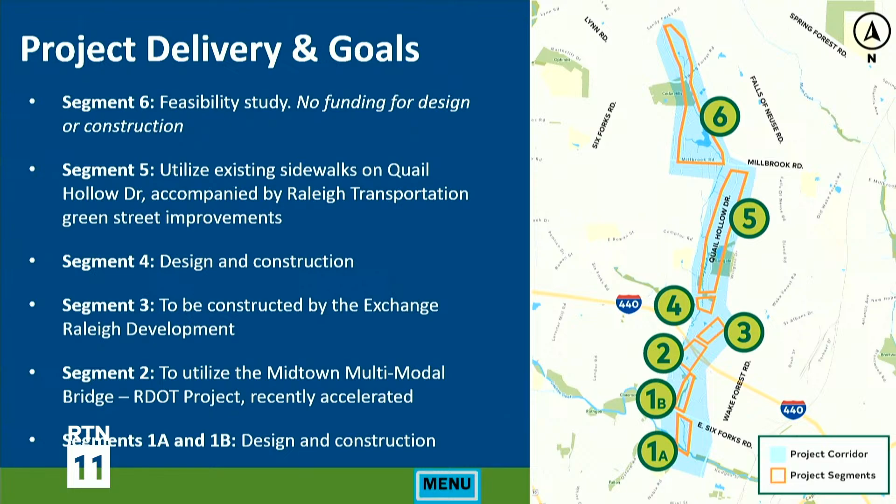To give a bigger sense of the general area - I think folks in this room are most focused on 1B, but this trail is much more extensive, in 6 parts, 3.6 miles, running from Crabtree much farther up north. For 1A, 1B, and segment 4, there are design and construction dollars. For segment 6, there's a feasibility study, but not design or construction. For other sections, it's through partnerships.

The bridge over 440 will be funded by RDOT, which is very good news - most recently, a couple weeks ago, more funding was given to them for the design of that bridge. Because of this Big Branch corridor, we saw the urgency for completing that long-awaited project, which is great news. Another segment will be done in partnership with a private developer, and segment 5 also with Raleigh Transportation at Quail Hollow, having an elevated bike path.

I want to call out the public outreach. I think Raleigh Parks is very renowned, well-regarded nationally for our fantastic public outreach, but this one really underlines it. 1,600 postcards sent out for phase one, 8,500 in phase two. In phase two there was specific focus on Crabtree. Anderson, when it comes to section 1B, had 3 sections through it in that first one, Anderson Forest - getting out to folks at Hines and Belvin and throughout Raleigh to make sure everyone knew about this very important Greenway that was coming was essential. They did a great job on that.

Now to go through some of the sections and where the rounds of voting fell. For section 1A, and this is an important one, this comes off of the trail specifically.

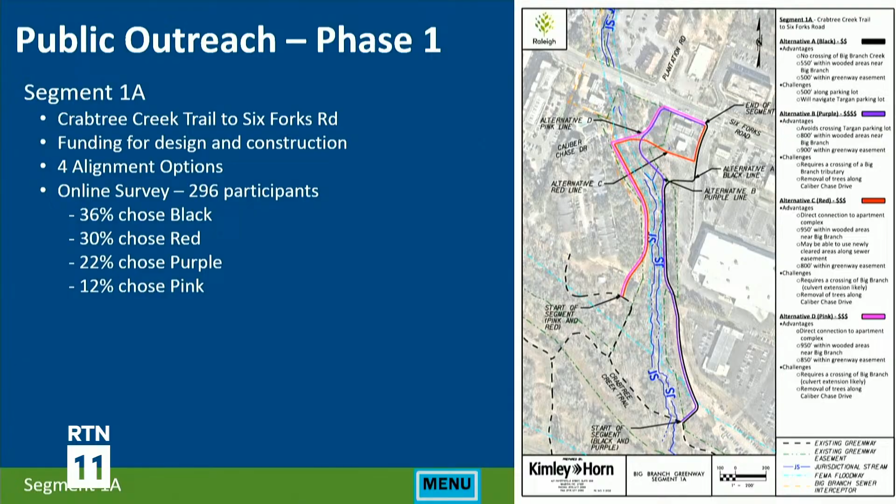This one was a combination of a couple different routes from the survey. The line in black is the one we ultimately recommended. What's important about this route is the Crabtree Trail is on the northern end of the banks of Crabtree Creek at that point. Coming up in that section is really important because when it crosses over, that would mean we'd have to build a new bridge. If we brought it up to Anderson or Barrett or other areas up there, it would require a bridge across the Crabtree. This is a section where we can just pull right off with very little vegetation issues, so we were very pleased with this section.

And then 1B — this is obviously the one in question, and one we'll talk about extensively today. From this survey we actually had 4 options: 3 were along the creek or stream, and 1 was up Belvin. There was a very mixed vote here: 49% for the roadside options, 51% for the stream side, divided between those 3 different iterations of those options.

For segment 4, again pretty clear feedback on this one — 56% preferred the black segment you can see noted. We did skip segment 2 and 3. Segment 3 was the one that goes to a private development, and segment 2 is the bridge that goes over at the end of Wake Towne, a bridge over 440.

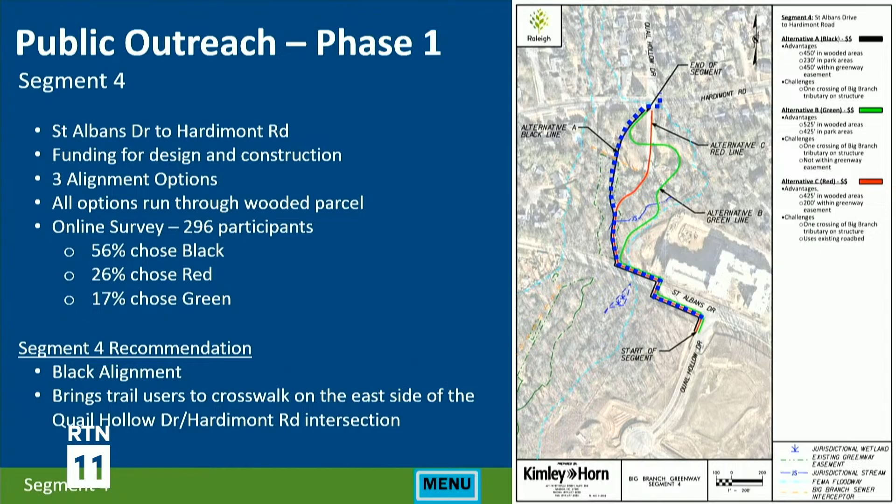And then overall, just looking at some of the concerns we heard and some of the feedback we got — obviously we had an open house, and we had an extensive survey, so we got a lot of feedback which we really valued.

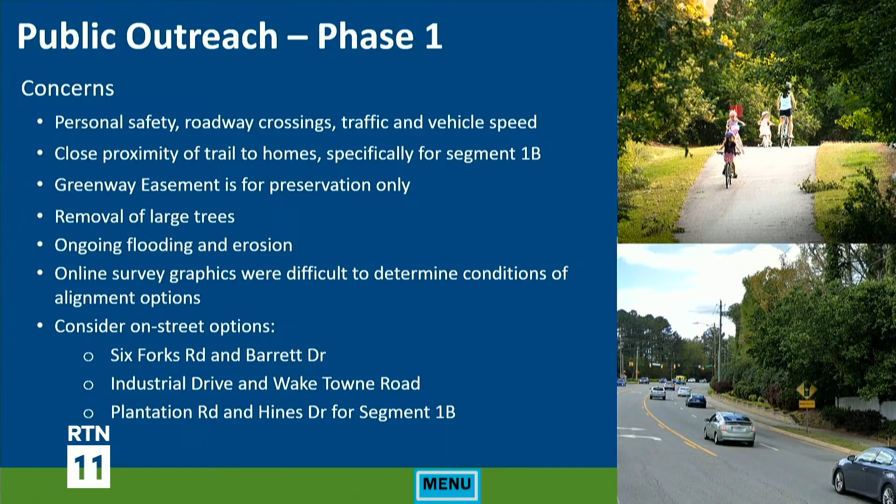Key things we heard: personal safety, particularly with the roadway crossings, traffic and vehicle speed — obviously this is near Six Forks, which is a dangerous road. Close proximity of the trail to homes, specifically segment 1B, which we'll talk more about. The Greenway easement is for preservation only, which I'm sure a lot of folks here will talk about — that was a key one. The removal of large trees, ongoing flooding and erosion, and then a push to consider different routes: Six Forks and Barrett Drive, Industrial Drive and Wake Towne, as well as Plantation and Hines, which we did end up including in the next survey.

I just wanted to zone in on two of those: Six Forks to Barrett, as well as Industrial Drive. There are lots of different permutations of trails we could pick, so these are two I'll focus on, but there are 42 other pathways this could potentially be on street — I think it's indicative to go into these ones specifically.

Any pathway that goes on the streets is not necessarily tantamount to a greenway. We're really trying to build a greenway, not a bike lane — and unfortunately a dangerous and not very appealing bike lane at that. This would involve 3 road crossings, 3 residential driveway crossings, 8 commercial driveway crossings — a lot of conflict points, which we really want to avoid, especially given the number of strollers, bikes, and cars on this pathway. Keeping it safe is extremely important.

On top of those clear safety issues, there's also the circuitousness of it. The big branch alignments we showed — the Hines one, the Belvin, as well as Anderson Forest ones — were about 0.57 miles, whereas this would be 0.95 miles. As we try to develop a greenway used for active transportation, where people are trying to get to work fast or get to appointments, that directness is really important.

Another important point, which I'll get to in a bit, is the sidewalks right now are 5 feet. We would have to extend those to 10 to 12 feet, as I'll show shortly, which means as you expand the sidewalk you start to go into people's front lots in a lot of those areas, particularly side lots through Anderson Forest on Six Forks. The next one has a very similar rundown.

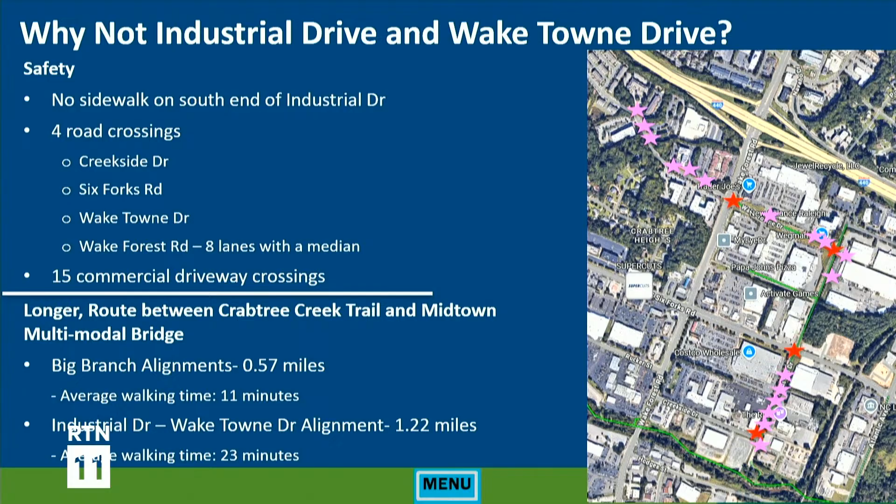This one is even more indirect. It goes from 0.57 miles with the three alignments we ultimately voted for versus 1.22 miles. So it's a much longer pathway, as well as severely dangerous for a lot of users.

This is relevant whether it's Six Forks, industrial, Barrett, Anderson, or any other permutation. The greenway needs at least 10 feet of width for the pathway, 2 feet on each side, so the existing sidewalk bed is never going to be sufficient for building out a greenway.

It's always going to require an expansion, no matter the route, or if building a new trail, hoping for somewhere between 14 to 18 feet - 14 being 10 for the path plus 2 for each shoulder, or 14 for the path plus 4 total for the shoulders. For this highly trafficked route, with turns and sometimes hilly terrain, you don't want to narrow the width significantly, because people coming around bends need that space to get around each other. So the width is important here.

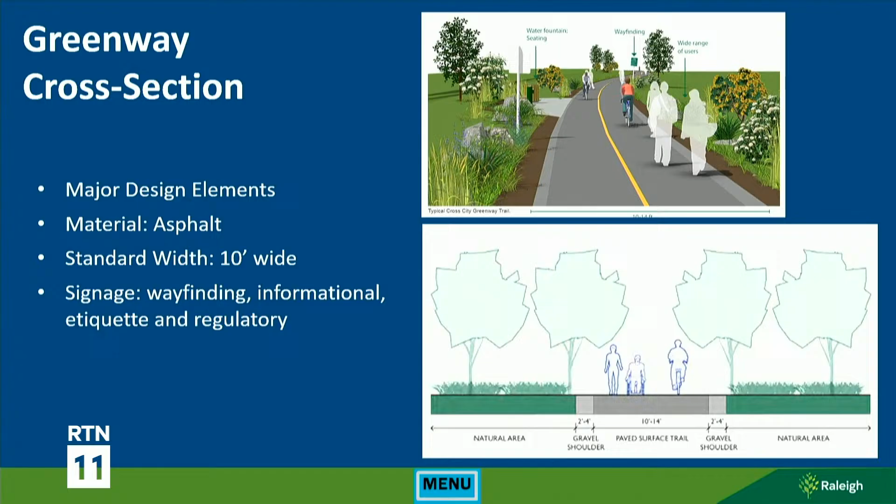This brings us to the three alignments that were brought to a survey. As detailed earlier, this was a very well-populated survey - I think aside from the Greenway Master Plan itself, the most voting we've ever seen in a park survey.

Three alignment options, with expanded outreach through door hangers and yard signage. We really tried to enhance the graphics and visuals so it was very clear what the routes would look like, along with improved alignment descriptions.

The survey itself, which folks have seen, is on the public input page. What we saw was 62% voted for the streamside alignment through the backyards of Anderson Forest, 34% for Plantation Hines, and 3.5% for Plantation Road.

If you drill it down, because this has a lot of votes nationally, which is kind of a quirk - sometimes it's people voting from far away, sometimes it's just the IP address - but if you drill down specifically near or inside 540 or 440, 68% were for the streamside alignment. So it's important.

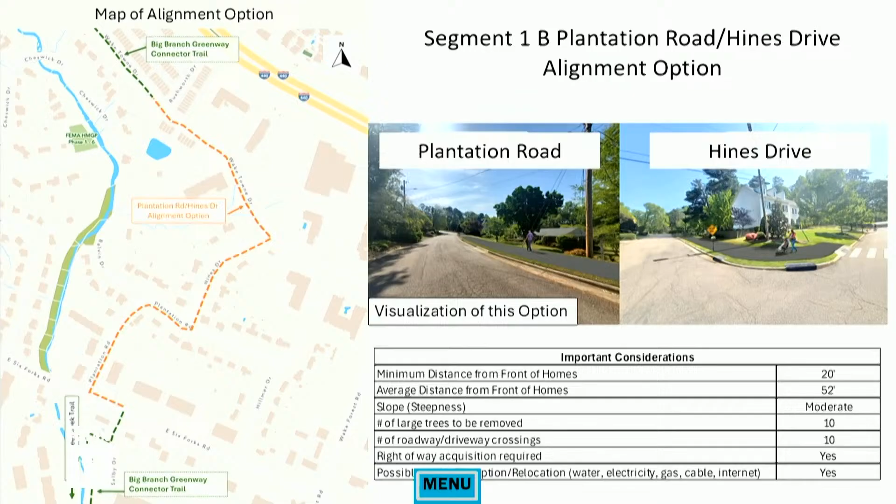We can go through these quickly, but this was the alignment shown in the survey and also during the public outreach and the public meeting.

Here's a complete rundown bringing things together - this is what was compared and what people saw as part of the survey, seeing the different distances from the front of the homes and from the back of the homes. The slope is obviously important, particularly for safety as we have folks going in different directions.

Number of large trees to be removed - you can see we updated that at the bottom after doing another analysis and a walkthrough with the Greenway Committee, the Parks Board, and members of the community. We do think it could be a larger number of trees.

It's hard to be very specific because we're not even at 30%, or 60% final design yet. We'll know the precise route and the number of trees impacted, the critical root zones, once we get there. At this point it's a guesstimate, but I think it holds the proportions where we see a bigger tree impact going through the front yards of Plantation Hines and Plantation Belvin.

Key takeaways from engagement: strong ongoing support for the project. Raleighites, as we all know, love the Greenway system, and across the board there's really high level support for this project, for Big Branch, and for the importance of continuing to build out a Greenway system, particularly in high density and fast growing neighborhoods. The streamside alignment was the preferred option according to the survey - that was fairly clear.

Impacted properties are concerned about reduced privacy and stormwater impacts - that's something we heard consistently, which is very important - and then user safety concerns due to Greenway crossings and traffic.

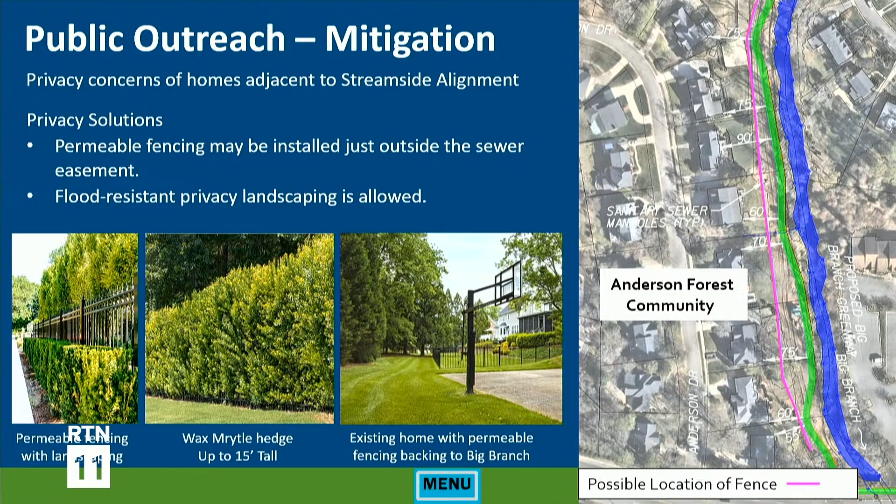Often you guys ask, can we do this sooner, can we do this quicker? Obviously adhering to this schedule is really important so things don't get pushed back. So please, opening it up to the floor for discussion. I know there's probably a lot of questions, so who wants to go first?

Ian: Thanks, Adam. So a lot of comments at the Greenway meeting. Two questions I've thought of since then. The first is on the Creekside option. Do you have any data from Raleigh Police about the difference in incidents or calls from a Greenway versus a utility easement, either for that specific area or in general, anywhere in the city, from current state to what it could be?

Yeah, we can come back with that data. I believe you guys got a letter this morning in support, but in general, we've seen from national studies, as well as studies from NC State and Raleigh, that crime rates stay the same or go down after a greenway is designed. We can look more specifically at different easements and greenways and what the rates are, so we can come back with that.

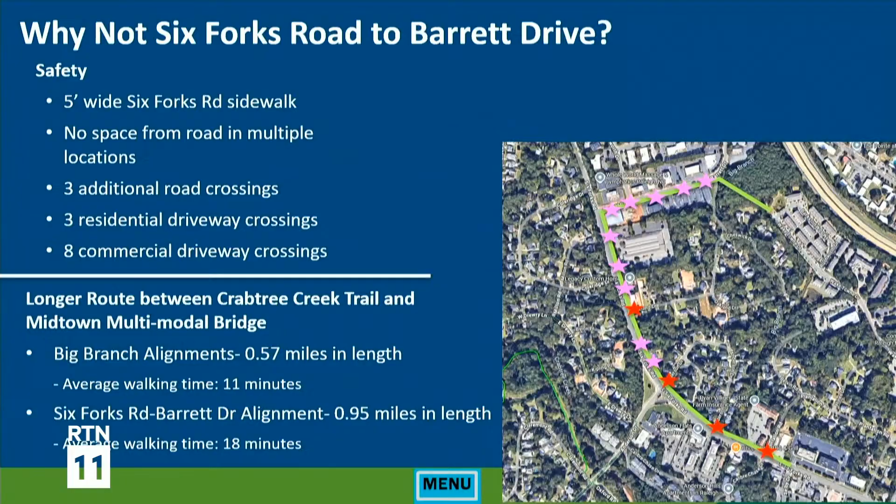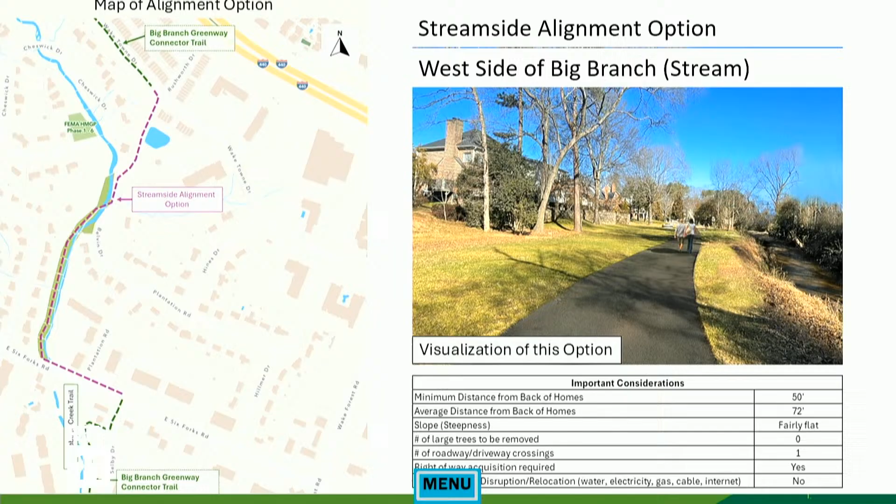And the other is, in the analysis, there wasn't any discussion about the fact that this is Neuse River buffer, and for 30 feet, there's not supposed to be removal or construction unless it's specifically permitted. There's no discussion about the difficulty or not of getting that permit, and I don't think the city should be removing vegetation and doing construction, particularly earthworks that are going to go into the floodplain and cause more flooding.

Yeah, and we talked about this, we had an email back and forth. I think this picture, agreed, is unfortunate because it is not representative of the stream bank restoration. Stream bank restoration, as we've talked about, invasive species that often break down the stream bank will be removed, as we try to do across the city. Local flora will stay, as well as increased plantings in order to fortify the stream bank. The roots fortify the stream banks.

So in terms of what it would look like, it would actually be closer to, we can show, significant vegetation brought to that space, not the opposite. So we will work on making sure that the visual we have from Kimley Horn is representative of the increased planting we're bringing there, not the opposite.

And then you didn't address my concern about moving into the Neuse River buffer and getting right on the stream bank. Yeah, I mean, so I think 68% of our greenways is within that buffer, is very close to stream bank. The plan, I referenced that NC State study, and then just in general, the basis of our greenway system is building inside of those sewer easements.

But that was from 1970? For sure. And I would hope that we've gotten smarter. And we have, and I think that's this slide, I think, underlines that.

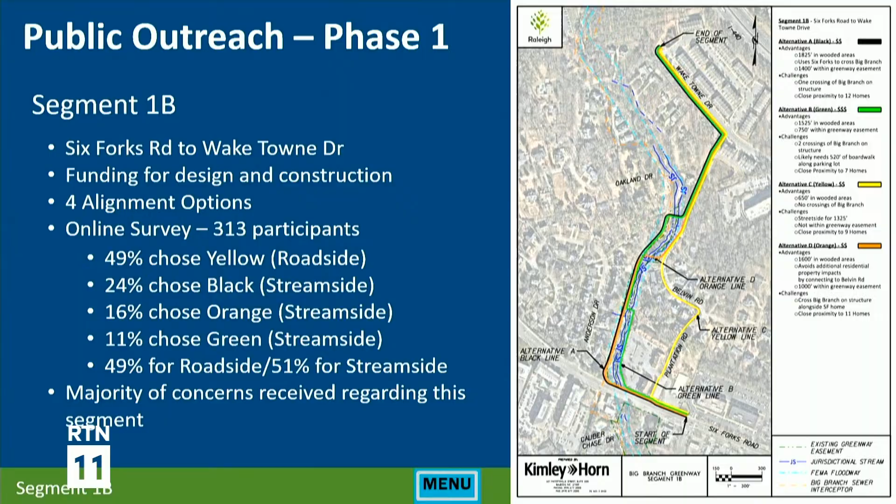The city already has the right-of-way, you can look at where the service poles are. We spoke about that, we can read the poles and tell whose they are. But the poles in many subdivisions sit significantly behind, because when the houses were built there was some thought of sidewalks and other things, and trees grow and people forget about sidewalks.

But the neighborhoods we saw have at least 8 to 10 feet. I'm assuming a sidewalk would have at least 3 feet of spacing from the curb, maybe 5, maybe 6 feet, depending on what you could fit in there.

But if you went with 5-foot sidewalks on both sides of the street within the land the city already owns, I don't think people would be happy losing many of the trees they've loved and planted over the years. But it would be a sidewalk, 5 feet on one side and 5 feet on the other. And yes, you can ride bicycles on sidewalks, that's where children learn to ride their bikes.

Yeah, I mean, that was certainly one of the options put forward, some permutation of that. It would mean tree loss and utility relocation on both sides rather than one, as well as sidewalks on both sides, or driveways on both sides. But yeah, that's something to consider.

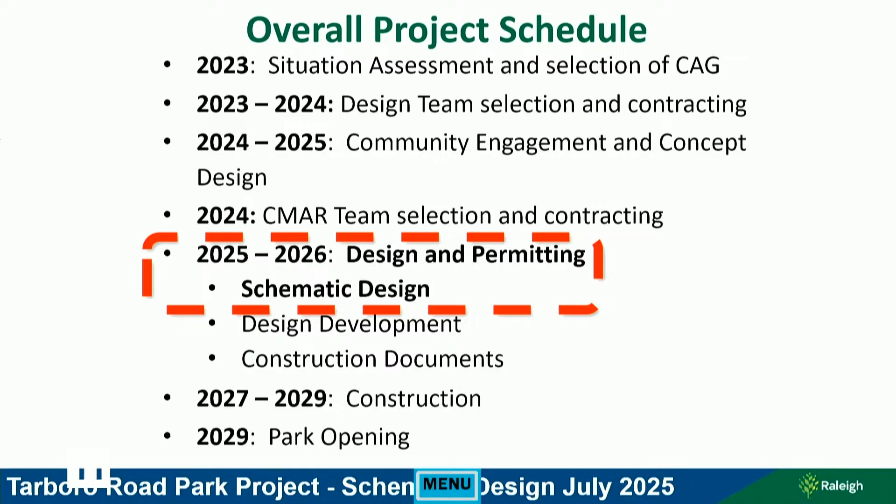Over the past year, we have gone through the concept and schematic design process. We anticipate that construction will start in 2027, last approximately 2 years, with a park reopening in 2029.

The design consultant is HH Architecture. The public artist selected for this is Deborah Asham, and the construction manager at risk is Clancy & Theys.

So the engagement for this project primarily revolved around the formation of a community advisory group. To date, we've had 5 meetings with that particular group. We have had 3 open houses to date, and we anticipate a 4th open house later this year as we advance into the next stage of design, just to keep the community informed with the design henceforth.

With each of those open houses, we also had a series of online surveys, and then we also had boards of the projects and a 3D model of the project on display at the community center.

So the schematic design itself really centers around the heart of the project, which is the central plaza, with most of the amenities surrounding that one central plaza. You can see the area circled right there - that's the central plaza. And immediately to the north of that is the brand new community center, which is a 2-story community center.

It's 21,000 square feet total with a gym. We do intend to go for LEED Silver rating on that. There are a series of overhangs that surround the entrance to the building that will serve as a porch and gathering area.

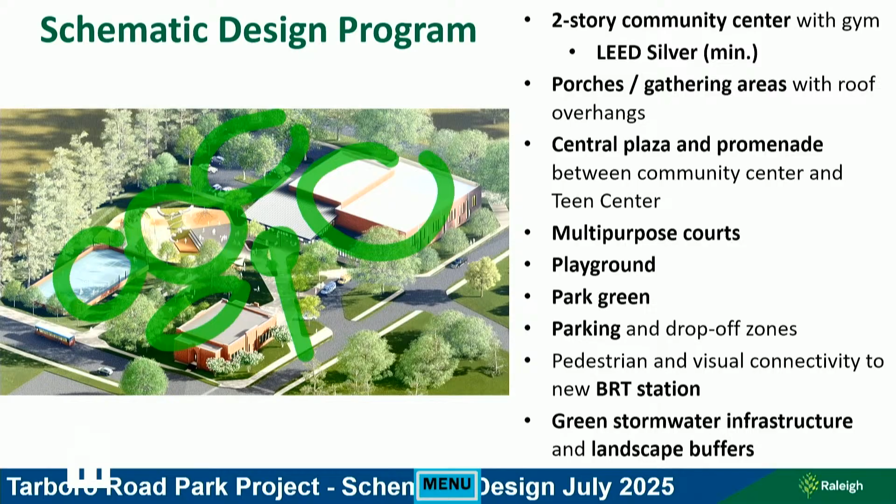There's also pedestrian and visual connectivity to the new BRT station that's going to be on Edenton Street. As with all our other bond projects, we are also incorporating green stormwater infrastructure, which you all heard about earlier today, as well as landscape buffers.

So here's a plan view of the site plan, again just emphasizing the proposed community center and the central plaza area, the playground, the teen center, the multi-use court, and the parking lot.

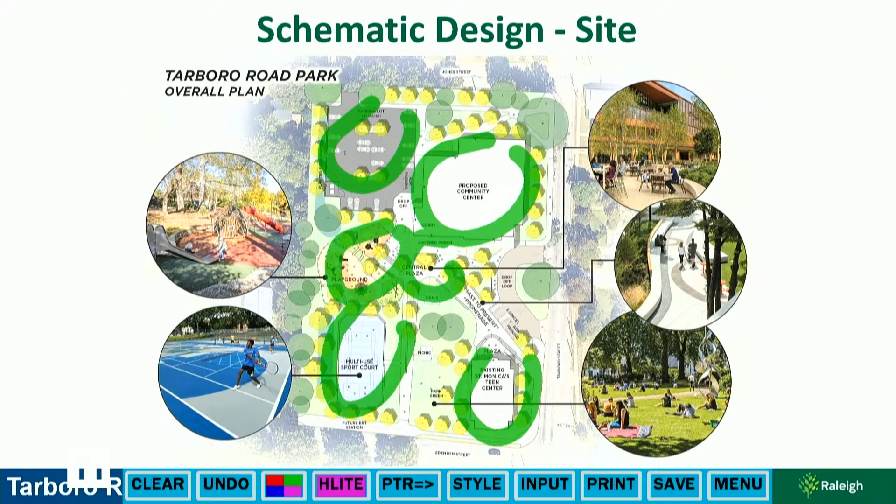There are 2 multi-purpose rooms within the community center. The smaller one is on the first floor. There's also a fitness studio. The rooms are connected by a rather wide corridor, then restrooms, and the remainder of the first floor is primarily for storage as well as the maintenance rooms associated with the community center.

And then there's the gym itself too, which is striped out for basketball, volleyball, and pickleball.

The second floor is composed of the larger multi-purpose room, which takes up most of that floor. There's also an adjacent warming kitchen, 2 family restrooms associated with that, and another storage room.

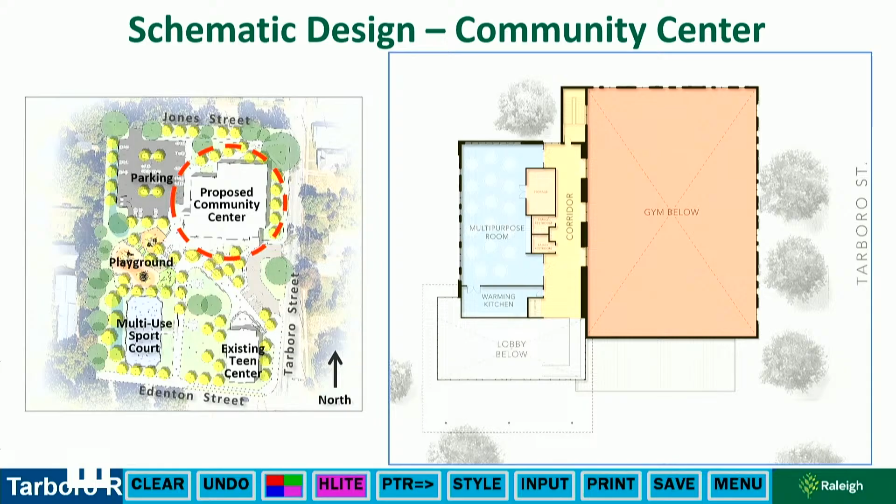The walls are indicated by the black lines. You'll also see openings within the black lines between the corridor and the gym below—those are windows so people can be up in the corridor looking down into the gym. Around the gym there's also a series of openings meant to represent windows that bring natural light into the gym.

Here's a rendering of the entrance into the community center, as seen from the playground, looking across that central plaza. So that's the entrance and that's the lobby area as well.

This also gives you a little bit of a preview about the current art concept, which includes a series of illustrations of community members, both past and present, incorporated into the glazing of that entryway.

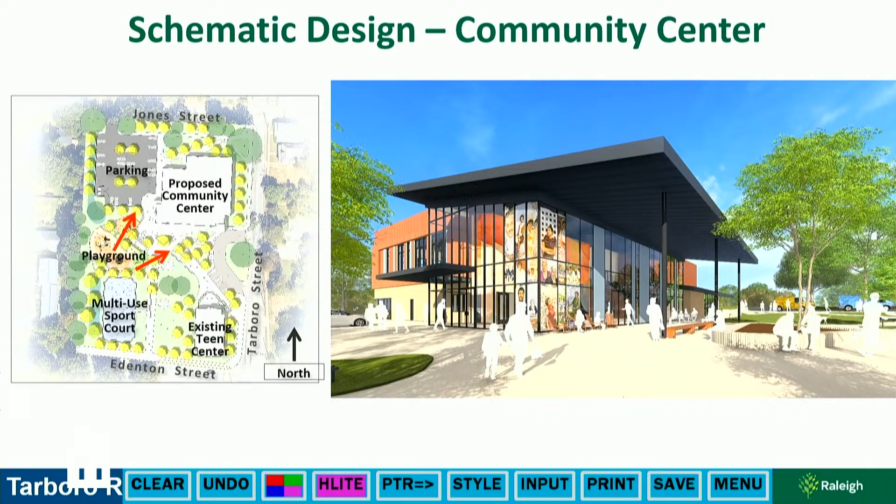Coming back to the site plan, I want to emphasize that 3D model we've used throughout the public engagement process. It's been really helpful to help people visualize during those open houses as the design has evolved over the past year, showing different representations of the community center. This is the final product right here, side by side with the bird's eye rendering.

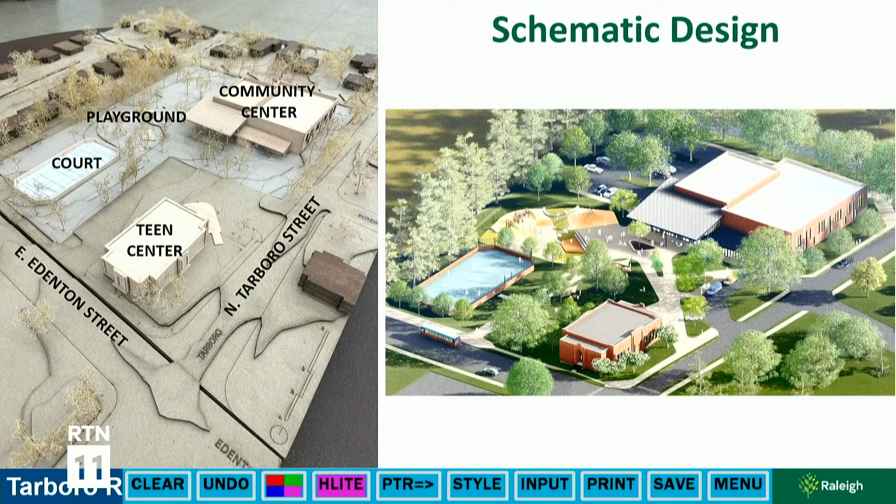So the St. Monica Teen Center has a number of interior improvements meant to improve the finishes and energy efficiency within the center, including new flooring, wall painting, window shades, LED lighting throughout, new cabinetry and countertops, acoustic ceiling treatments, and new restroom finishes and fixtures.

Along the front entry into the teen center, there will be a new plaza area meant to improve accessibility into the center, as well as provide a good connection to the past-to-present promenade I previously mentioned. Being a historic structure, there are no planned improvements for the exterior of the building itself, other than the plaza entryway, which is not associated with the facade of the building.

The public art process—the artist is Deborah Asham. She has been involved in several other Raleigh projects before, but for this project her work centered around drawings of historic places and people important to the neighborhood around Tarboro Road Park, including scenes of community life based on family photos, as well as interviews she conducted with community members. She's also embraced the neighborhood landscapes in her artwork.

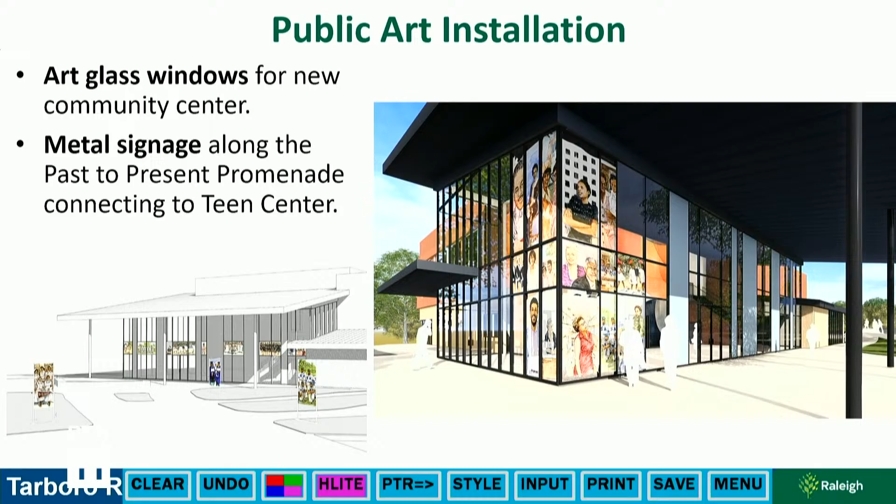Next steps: we plan on going to council next month in August. Next month is also the start of the design development phase, the start of the advanced design stage of the project. We plan on a fourth open house, currently scheduled for October 22nd, but that's penciled in, not set in stone—there may be some change based on how the design progresses between now and then. But we plan on the open house sometime later this year.

Next spring is the start of construction documents and permitting, with construction bidding in early 2027, start of construction in spring 2027, and park reopening in spring of 2029.

Staff recommends approval of the schematic design for Tarboro Road Park to send to City Council. I'm here tonight with Kristen Hess of HH Architecture and other staff members, including our construction management parks team who are overall managing the project. I want to thank the CAG and community members who helped the design process, as well as Ken Hessler, Tori Voska, Kara Stewart, Tarboro Director Dwight Campbell, and Teen Center Director Aaron Lassane. They've all been valuable assets in getting to this point in the project.